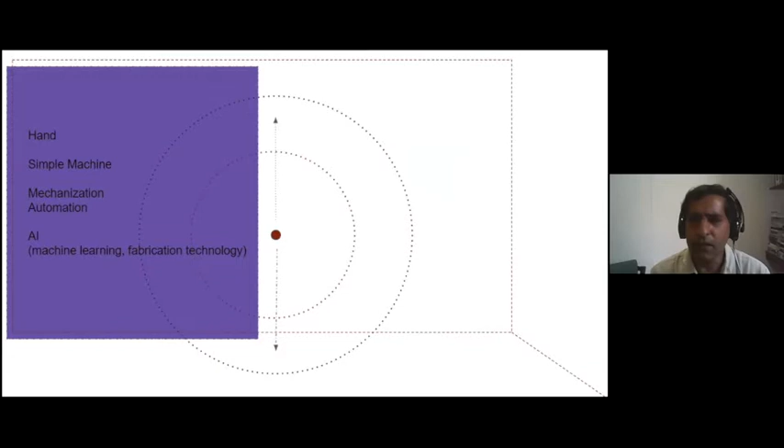So we all know that we started with the hand, and then we developed simple machines. Then we mechanized it a little bit, and then we automated it—automation meaning you completely mechanize it instead of partially. And now we are witnessing a world where we talk about machine learning, fabrication technology, 3D printing, and all of that.

We know that machine learning data feeding is constantly used by digital platforms to sell stuff. So if you check on your website about a particular kind of book, you'll be flooded with similar books. If you check a product, let's say a green color shirt, all you will receive is green stuff. So in a way, digital media is trying to corner you into a limited choice.

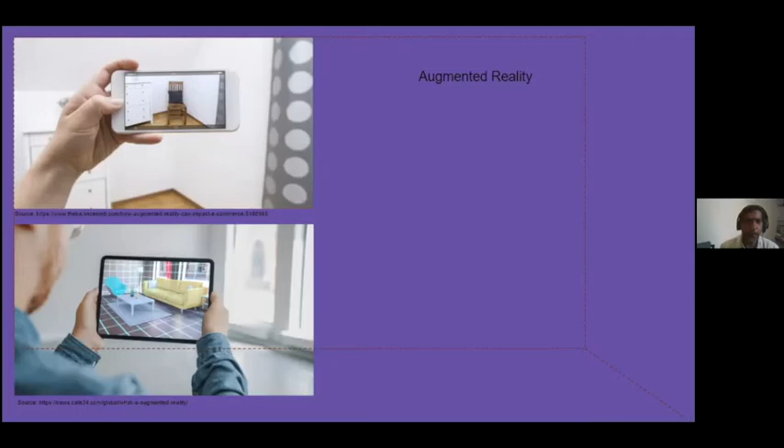If you look at the world of digital architecture, sometimes called parametric architecture, you'll find a lot of smooth, curvilinear forms. Parametric forms are generally mathematical equations, algorithmic, and as you change the geometrical parameter, the shape changes. That's a way of deriving form, but there are also many other uses, including simulating cities to find out how services can move efficiently, or how to organize buildings.

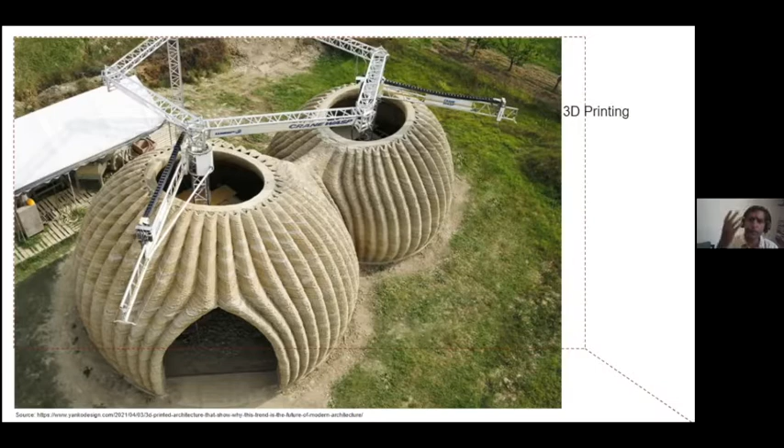3D printing, if raised to a certain level, can be an extremely useful tool, because otherwise most construction happens using linear members. If you want to cast or fabricate non-linear members without 3D printing, it becomes extremely expensive. So you can look at the potential of 3D printing in that sense.

Parametric design is pretty much common today. In the next 15 to 20 years, we will get a generation of people who would be extremely efficient in developing algorithm-based tools, or working with algorithm-based interfaces, unlike some of us, or unlike some of you listening to this talk. We are going to see a world of dramatic change, and one can look at this change in a number of ways.

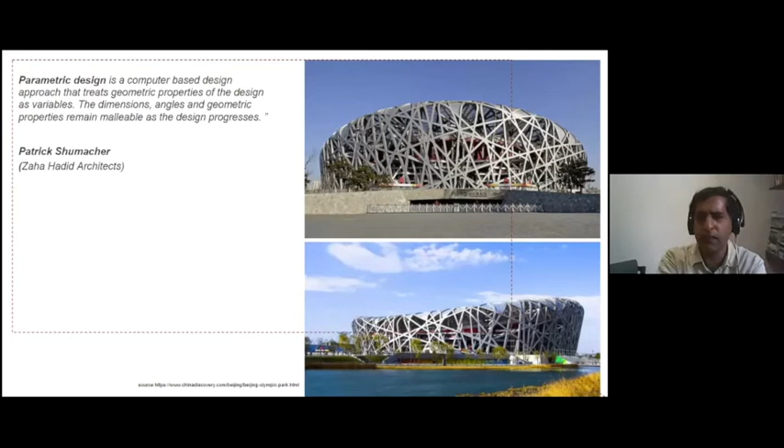Each generation of architects you know have mostly embraced their time fully, and those are the people who are pretty much well-known, not the ones working from the other side. The people working from the other side you will know as dots in space, like Hassan Fathy or some others. But the people who have embraced it are called the mainstream people, and you will know them much more than any other.

Now, we can only argue. We cannot get into a discussion of wrong and right. We can get into a discussion of trying to critically look at what it offers to the world and to the human race at large.

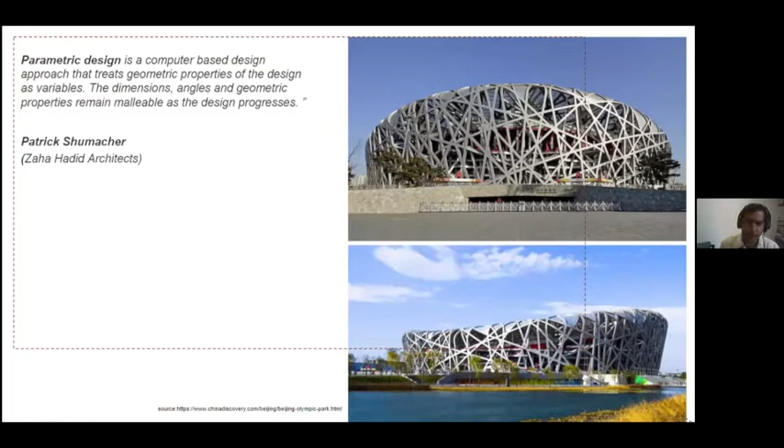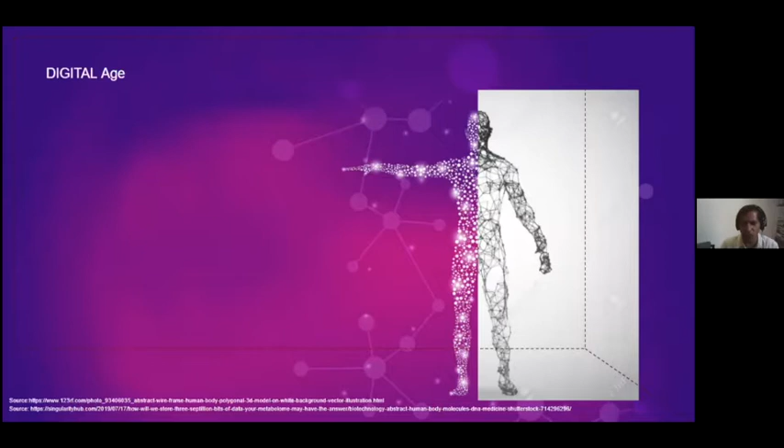So if you look at a digital age, the body is imagined now to be made out of surfaces, or imagined to be made out of atoms and molecules, connected geometrically and through polylines. So you imagine this to be an interconnected world. Now the question is, what happens to the hand in this kind of a world?

I'm trying to say that sedentary postures are privileges, and what is happening is that for whatever reasons - lack of working population, so you automate it, or the desire to meditate and enlighten, and in order to do that you need to sit and think about meditation as work, not making as work - therefore in a society you position some over the other, so one gets more precedent or more privilege, whereas in no way can you compare the knowledge of a carpenter to be less profound than the knowledge of a professor sitting and teaching courses somewhere. So sedentary postures are privileged over the postures of making.

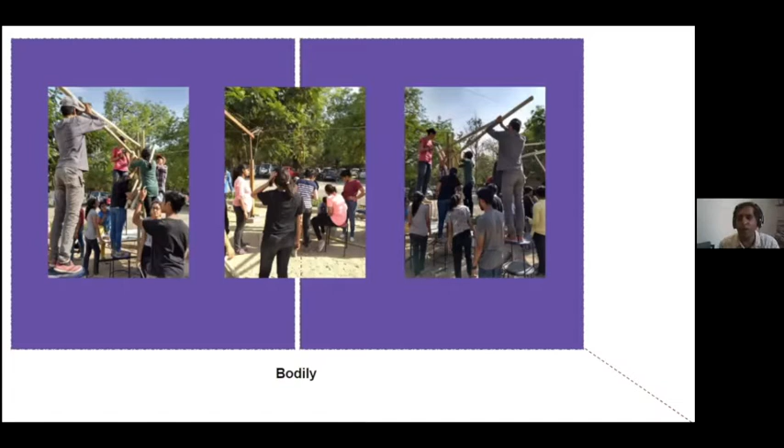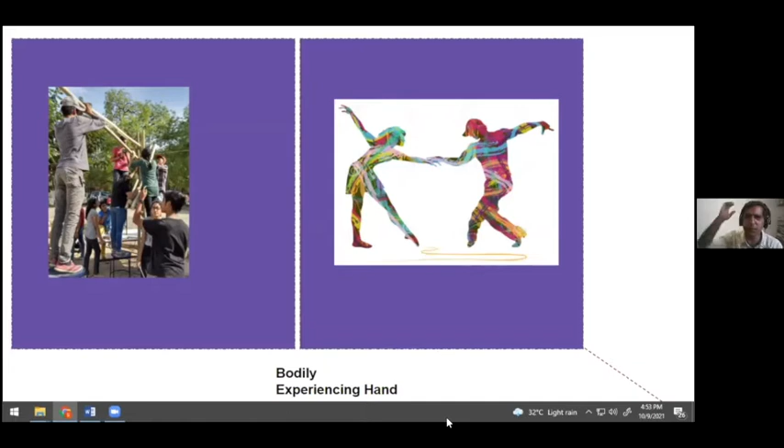So making is like dance. Like in dance, you use bodily gestures, you circle it, you make lines, you make planes, you make cones, expressing through bodily expressions. Similarly, in the act of making, all these expressions come out. But culturally, we privilege the act of dancing more than the act of making, for whatever reasons I'm not interested in talking about right now. So what we are interested in here is the body, and therefore the experiencing hand - the hand that is engaged, the body that gets engaged in the act of making.

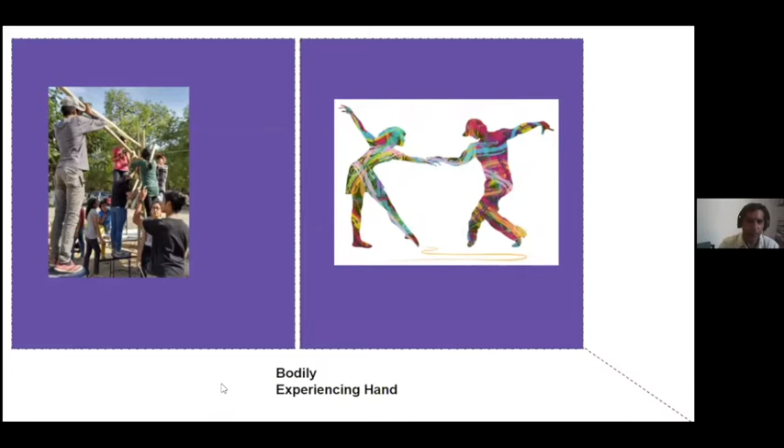Now, what is happening is that most of the time we are engaging ourselves in an orthogonal space. When we are engaging ourselves in an orthogonal space and we look at the grid that has been put there, what happens is that in reality...

In this kind of an image, one is standing on the ground, and it is bearing something. Then there are walls or columns which are also landing onto the ground. And there is some spanning member which is resting on the wall. From the wall, it goes to the ground. So the spanning member, when it is orthogonal...

it gives the impression that the space is orthogonal. It also gives the impression that these elements of the space can span itself linearly, and therefore we get these kind of spaces. Now there is a construction logic also to get these spaces, but we can discuss that sometime later.

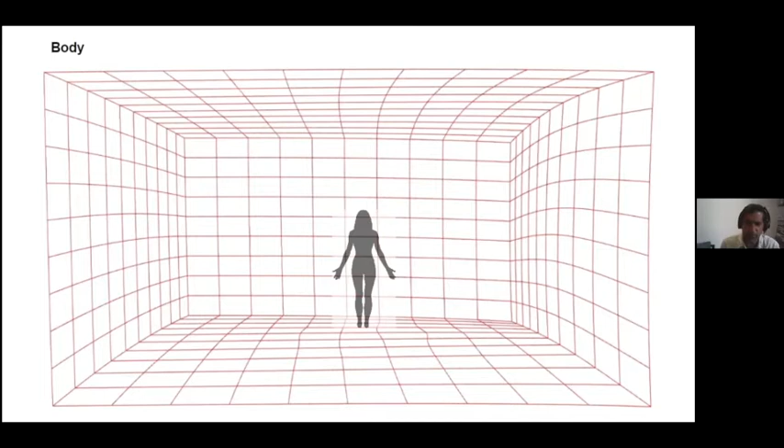Now what happens when this grid gets distorted? Once from the orthogonal grid, we go to a grid which starts getting distorted, the distortion in grid is a change in shape. And change in shape is force. So for example, let's say you can use a linear member...

and you can get a hyperbolic paraboloid. But all curvature you cannot get using linear members. So for that, you have to curve the space in order to get it. And therefore, the change in shape...

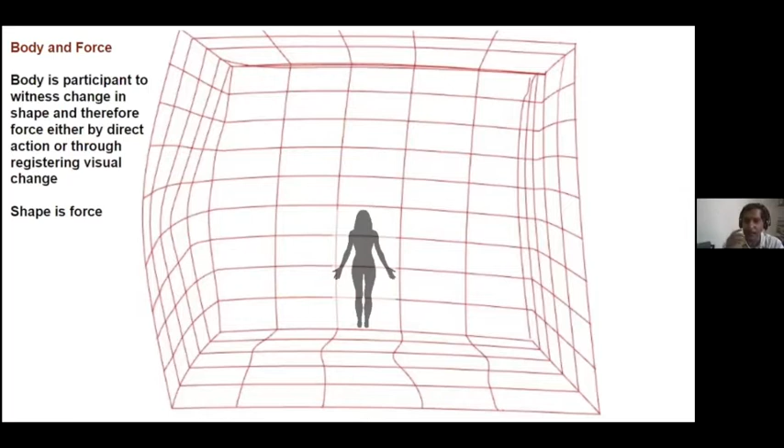is force. And when we are moving in that space, in reality, when we are seeing these curves, we are participant to the change in space, the change in shape that we are experiencing, and therefore the force. So we are participating in it, we are not directly experiencing it in the sense of weight and mass, etc.

Which means that the distortion in grid can give us any kind of space, and second, change in shape, if it is force, and if it is not—let's say fake for the time being—that it is not an impression of the curve, but in reality is required to transfer force, that becomes a way to articulate. So I'll go a little bit further.

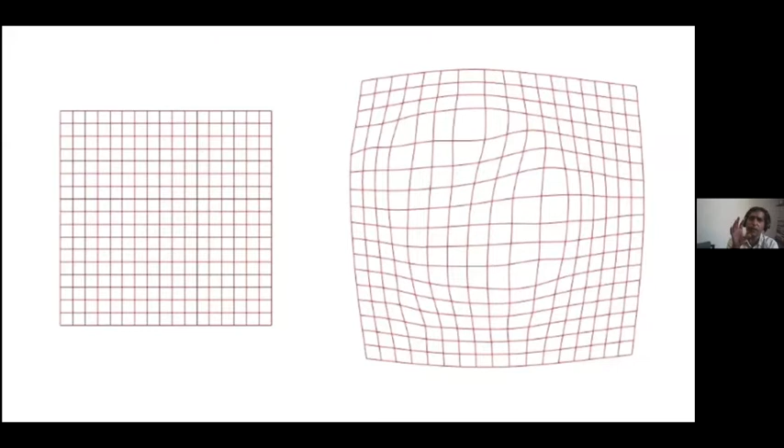So what we are doing is, if you read physics a little bit—I'm sure you know a little bit about A Brief History of Time and black holes and all, which Hawking wrote—basically, from dark matter, you sort of see the universe expanding.

But what is space? If you look at it from the point of view of physics, space is occupied by matter. So space is matter and matter is space, if you start looking at it from that point. So if an architect says that they are making space, most of the time what they mean is that they are making space by organizing the walls.

And in order to further argue this case, if you are saying that the wall is displacing material, the wall that the masons are making is displacing material, and they are making space so that the wall can be in that space, we are able to—but the language of the space remains the same for both the agencies. Now...

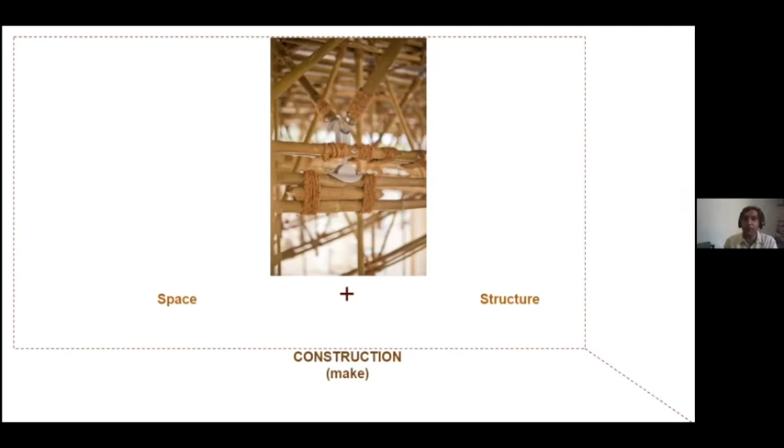Without the knowledge of the makers, there is neither space nor structure, because structure requires material to get its form and shape. There is no visualization of structure without material, because it is the material that gives the form. So our practice is to some extent an intersection between structure and space, on the crossroads mediated by detailing.

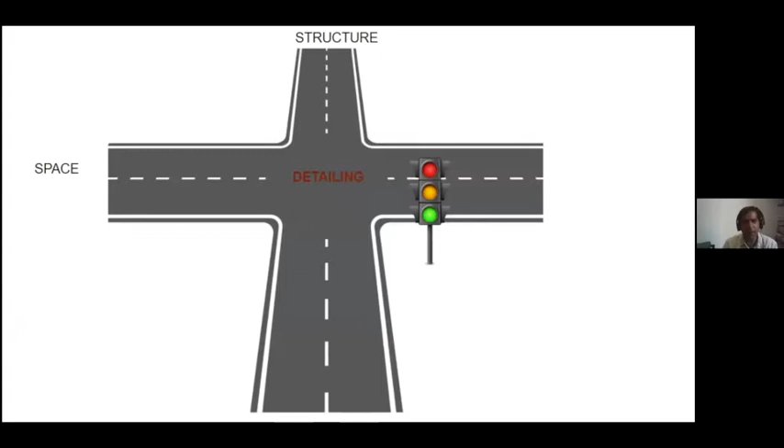I'll go through a few slides to give you some sense of it. Some of these projects are either done or in the process of construction, but you can see the attention to detail in some or the other way.

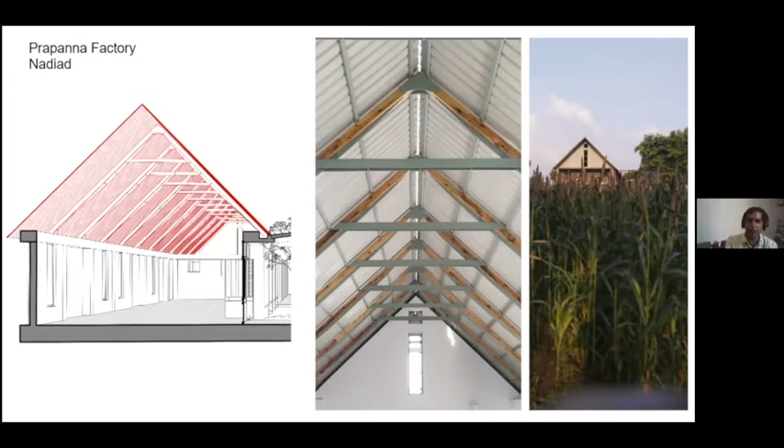If you look at this project which we are doing, on the left side of the plan there are columns which are closed; on the right side, there are columns which are spaced. Architecturally, once we get a program, we try to connect to structure and space, using tectonics, or the idea of structure and space together, so that it also creates a context for articulation.

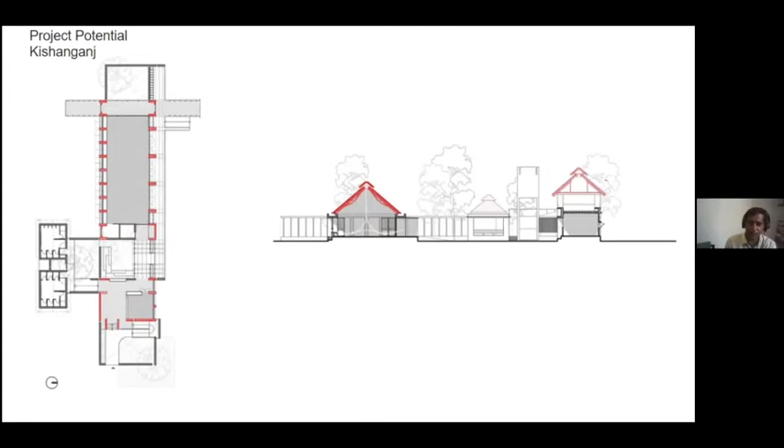On the right side, your spans increase, so now you have to think about beam depth and all of those things. All these things lead to articulation. This is being made, you can see it - they have to change the sheet. This is temporary, but it's still being made right now.

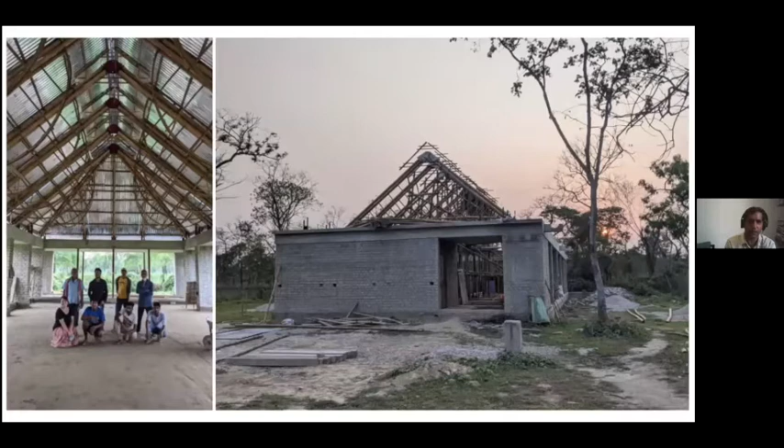If you look at the small residence which we were doing, most of the time we are fairly clear about our structural grid, and we position ourselves in a way that does not really depend on the structure engineer. Of course, we heavily depend on their calculations, but we have a sense of how to make the structural patterns, both in space as well as on ground.

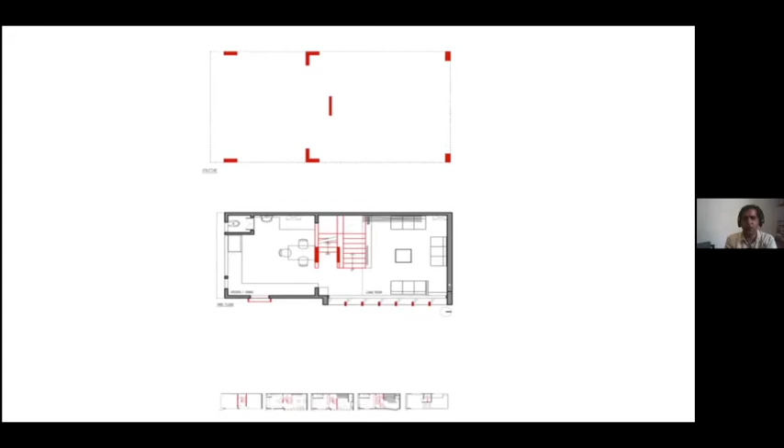It's a very small residence, about 50 square meters. The staircase is mediated between the two spaces to make it feel large. It has two common walls and two sides that open up. It's fairly open, and it just takes in light from one side.

Every time we have an opportunity, we want to express lightness. Because it's a very tight building, tight space, we use steel, and we express it by folding it. Once we fold it, we look at how much we can push it - it's asymmetrically placed, using two angle sections that fold themselves.

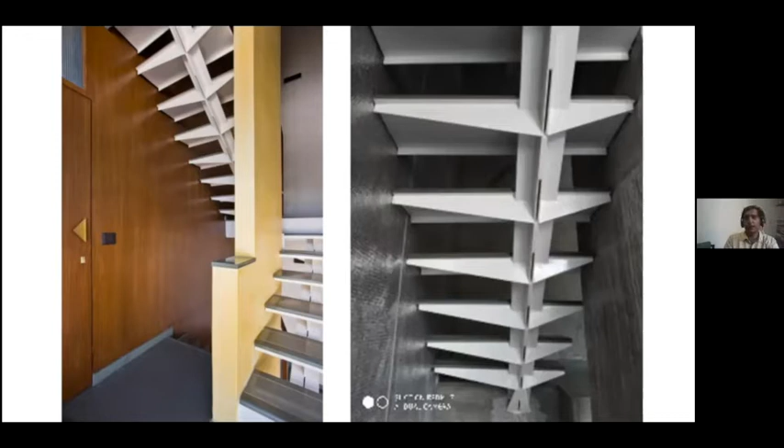It also uses stone as an upper member to strengthen it, because if you look at the width of the step, it's not sufficient to give enough strength - it still has vibration. Once you put that stone member, it becomes an active system and stops the vibration.

So you look at some of the space again - both interior and furniture, everything has been done by us.

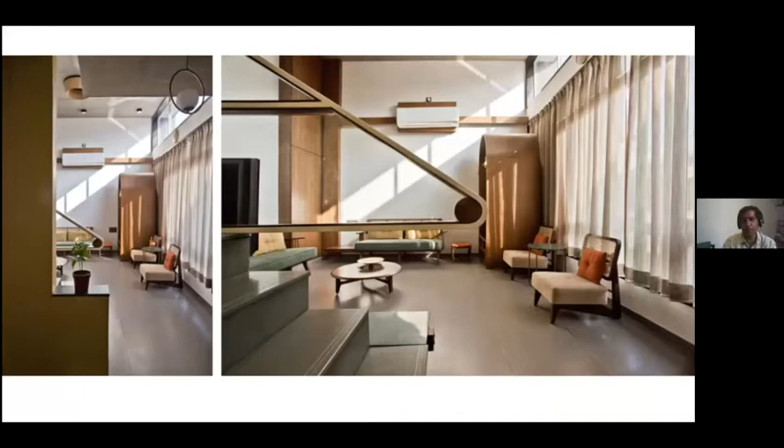We also engage in exhibition work. This we did with Workshop Inc, where we developed the exhibition pavilion, or the stalls, in bamboo. It was all made in our workshop in Surat, transported, and then assembled here - made in parts and then assembled on site.

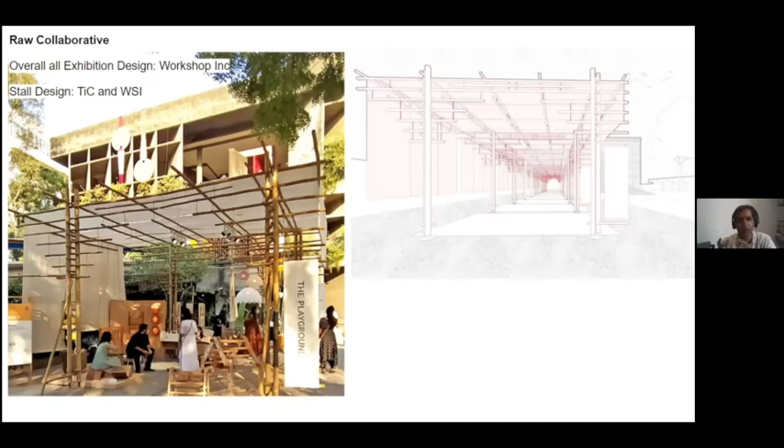If you observe carefully, you can see there is no continuous member - there are gaps, which means the vertical members help transfer load. In a way, each of these members are floating, and there are steel rods trying to connect and make it whole. If you look at the posts, they are diagonally organized, because then it becomes a three-dimensional space that we are creating, since most of the time we are looking all around.

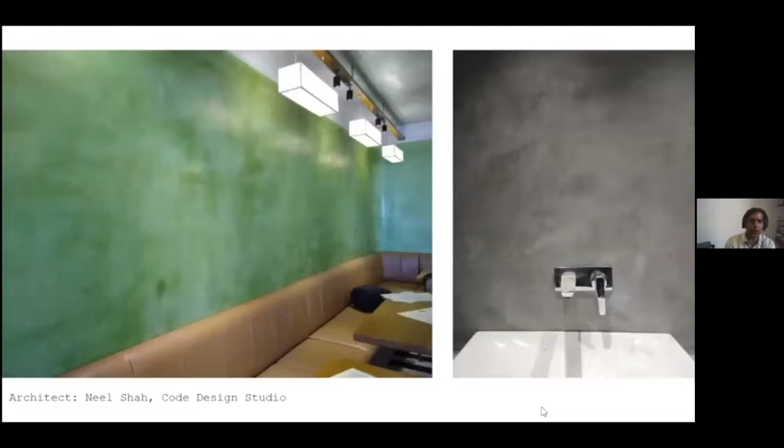We did this Alila View in Goa, this whole wall which we did in poured earth. We also do a lot of lime plaster, so you can see some of them here.

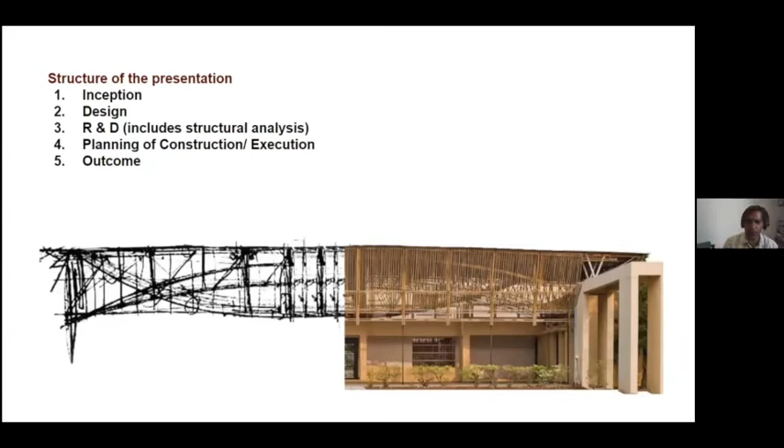I won't show too much more, but I've given you enough background, and I'll now move to the real project. This project is basically a Yogashala where people come to perform yoga. It's in Mulugu district right now, an area declared a World Heritage Site, the Ramappa Temple.

The client is Jyoti. She's extremely passionate and knowledgeable, both in terms of education, but also in organic farming, yoga, and wellness, and all of those.

She was earlier running the school, which was designed by Sudhir. It was quite a beautiful school, actually. But she wanted to move to the next level, and said maybe she has worked enough in education - she wanted to work in holistic living, etc.

That is how she actually asked Sudhir to do it. So Sudhir gave us the project and said maybe you guys can think about doing in bamboo, because she's trying to think about a yoga place, and it has to be somewhere celebrated. So this is how this project got into being.

This project is around 3,400 square feet, with a 78 feet span. This is currently the largest span in India, and we have used around 2007 bamboos in constructing it.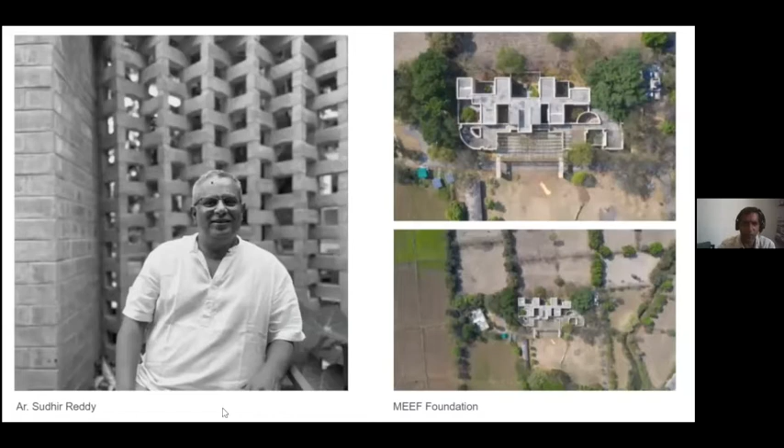Initially, this is the site. We have the Ramappa temple here, and this part has been declared the World Heritage Site - it's a beautiful surrounding. There's also a good amount of rainwater harvesting.

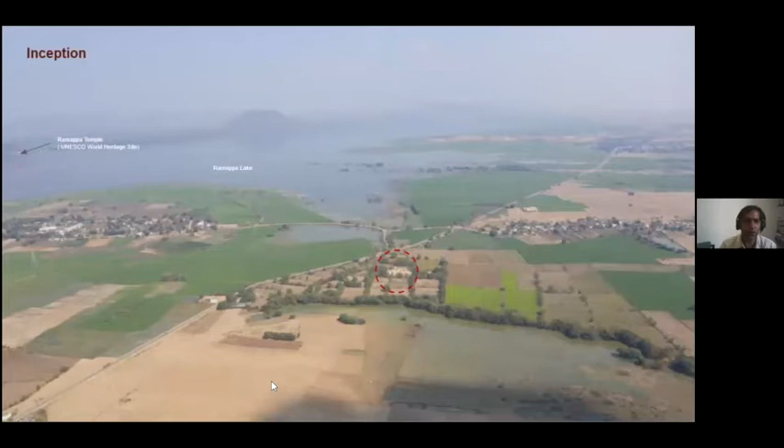They do the rainwater harvesting, and then use it over a period of time for cultivation, especially paddy. So this is what the school was like.

Earlier, she had asked us to design a separate building and treat it like a jewel. So we started designing for a separate building where we have this sense of yoga as something which gives you some degree of balance, and elevates you in some way. It lightens us in some way, and it's also a secular tradition - if you read the Yoga Sutras, Patanjali, etc.

Which is actually hardly a work of Patanjali. But anyway, if you read it, you may realize that it is close to atheism or agnosticism. In no way is it close to the other side.

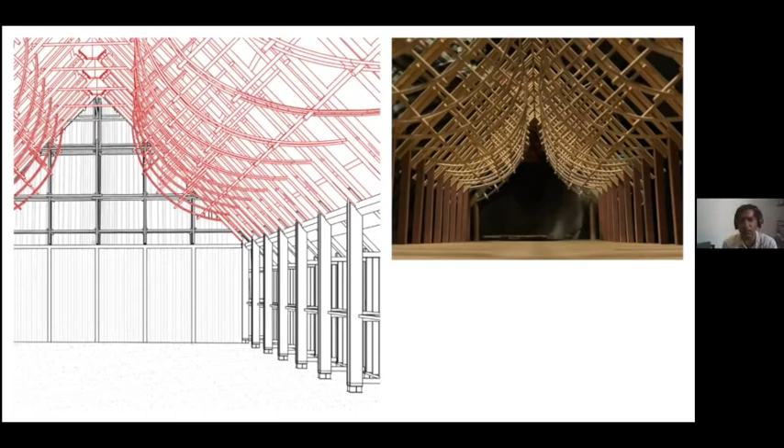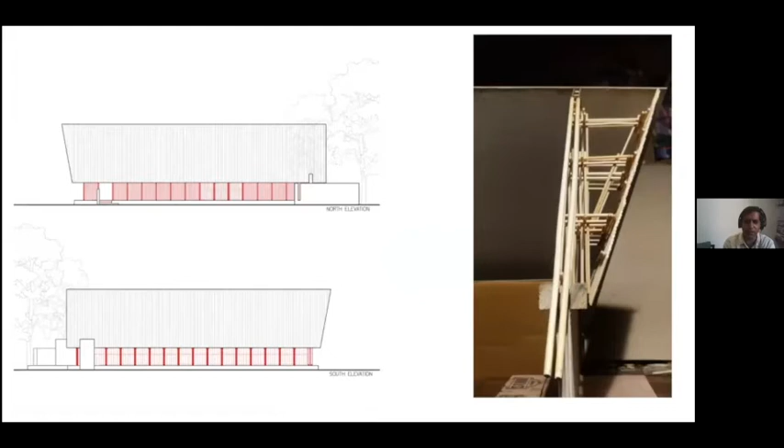Earlier we had done this like a pavilion, with timber and steel columns or posts, and then a bamboo roof, and we had worked out details. On the right, we had worked out how to end these kinds of buildings, because that was something we had been struggling with - Milind and myself have been working on this area for a long time to figure out other ways to end it than what we had been seeing. So earlier we had done these kinds of articulations.

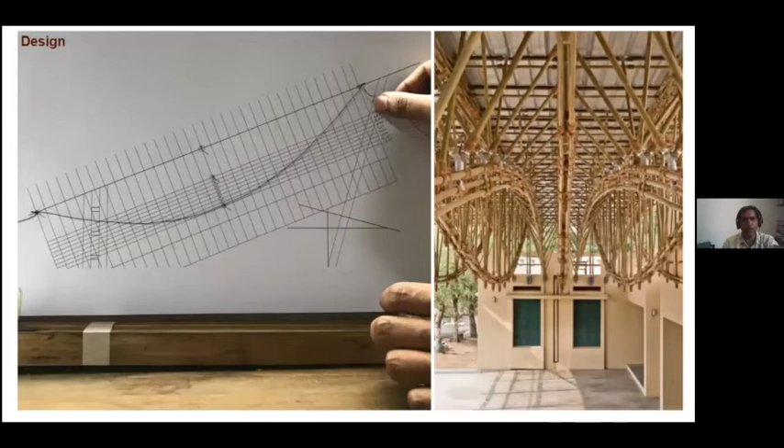We had done full-scale models, etc. But then it didn't happen, because Jyoti thought it was better to use the central space and really do a better job than to add one more piece of infrastructure. So after a long thinking, we said okay, it's all right, let's go ahead with it.

Sudhir further complicated it by saying we should not work in the shorter direction, but in the longer direction. So the challenge became tremendous, because 78 feet spanning was a lot of a job, and we had not done it. The only system we knew worked was trusses, or a compression-based system, but that was not something we were very comfortable with.

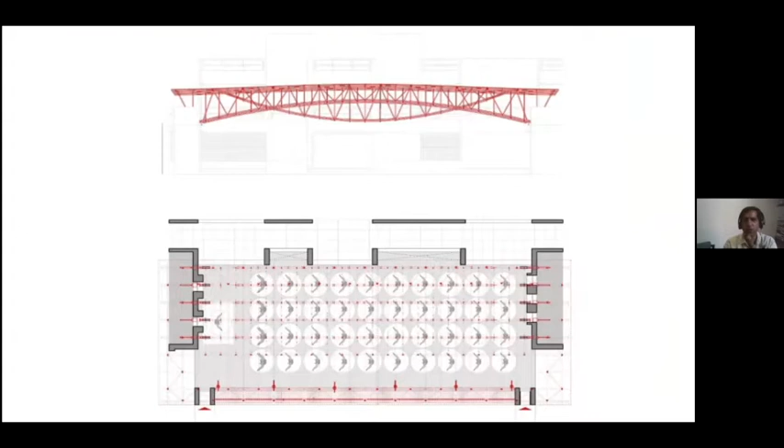I'll explain later. So this is what it looks like right now, and these are some of the models of it. This is what the plan looks like, and that's the section. Around it you can host about 40 people to perform yoga, and if you need more, you have to spill over.

What was important in our mind was, one, the fear of whether we'd be able to span it or not, and second, our discomfort with trusses, because we had not seen an ample amount of trusses in nature. We had seen triangulation, but not a very convincing example of trusses.

Though the body has some amount of it, much of it is thought of like a tensegrity. So we were thinking about how yoga is about balance, and life is about expanding and contracting, like a tree and a seed. The tree decays over time, gives seeds, and the seed again becomes the tree, and life keeps going like a cyclic process. So the continuity is of the process, not of the individual.

We were thinking about this experience of expansion and contraction in the space being important. Looking at it from the point of view of reversal of forces, what we worked out was a beam in which the deflection is taken care of by a curvilinear member in tension, but stiffened by triangulation in the plane. Then you have a compression member below the beam, so that during extreme deflection—which happens because of creep over, say, 5-10 years—there are diagonal members starting from the top chord of the beam and resting on the compression member.

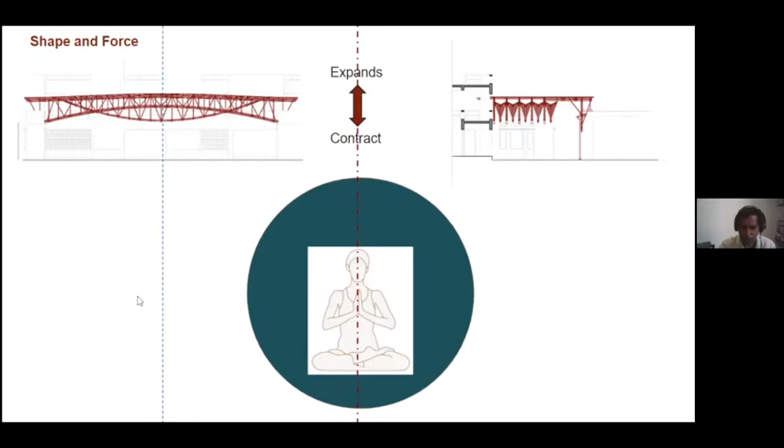So look at the density of the member—if you look closely, it diagonally comes down. Every time it becomes sparse and then dense, and similarly this is happening in the other direction as well. That's how it gets manifested.

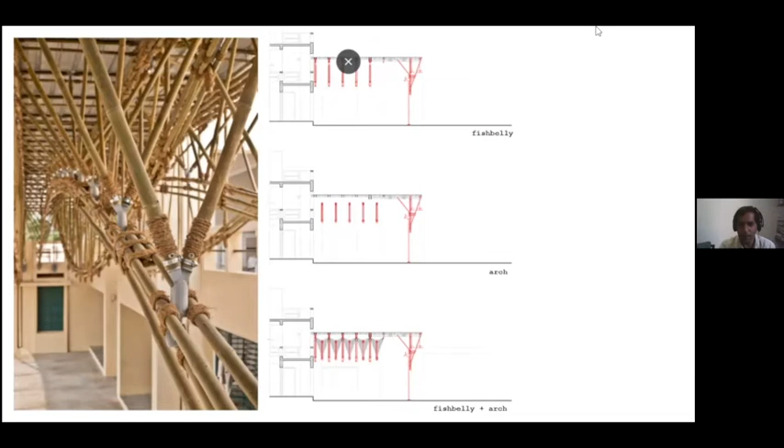What we're calling the fish belly is at the back, and the compression member, which is an arch, you're seeing here. From the top chord of the fish belly, which you see down below, the members in compression get connected onto the compression member. It rests itself diagonally onto the compression member, and that is how we were tactically able to span it without really getting into trusses.

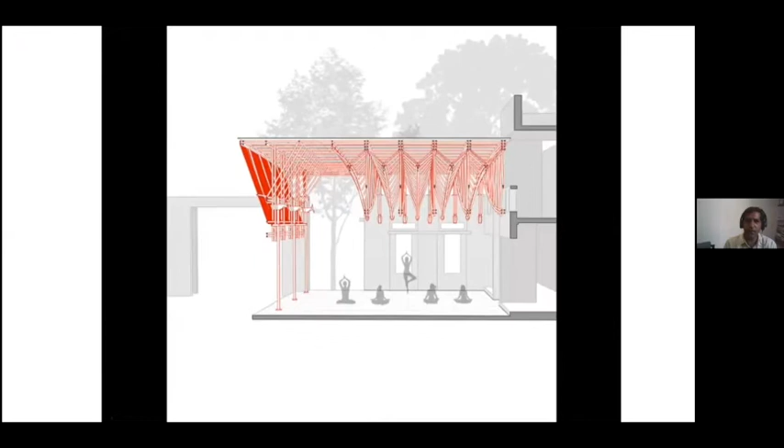If you look further, we'll show you—you see, as you go along, it rises and it falls. So it's both the sections, and our plan is oriented accordingly so you can get a sense of it.

If you look at this right image, this is the space of performance. You want to treat it as sacred or whatever, but some experiences require a particular symbolic treatment to make them important, apart from the design itself. So someone comes there and performs yoga in this space, which on one side is connected to the landscape, and on the other three sides has the building with some porosity. Then there are leakages on the other side a little bit, and this was the gate of the school, which we had to use to make a slightly larger space in the other direction.

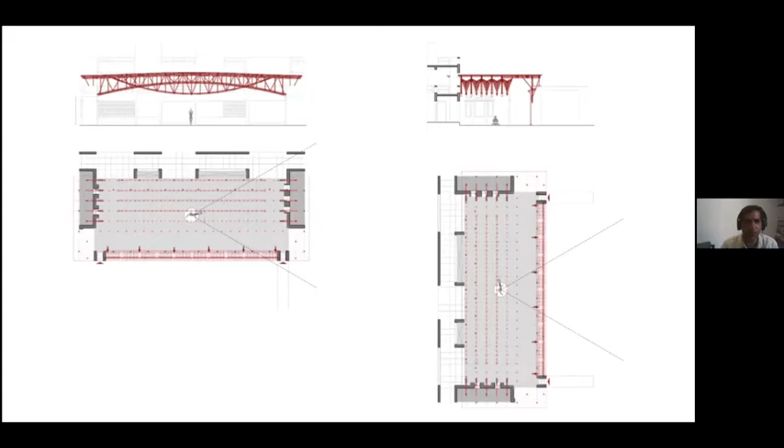Now visually, you start seeing and connecting depending on what orientation you are connecting to the other side. I'll show you further, so if you look at this now as an experience, if you're performing.

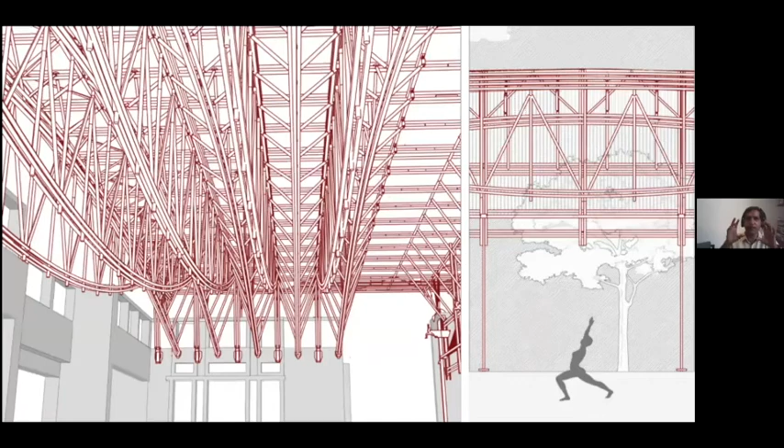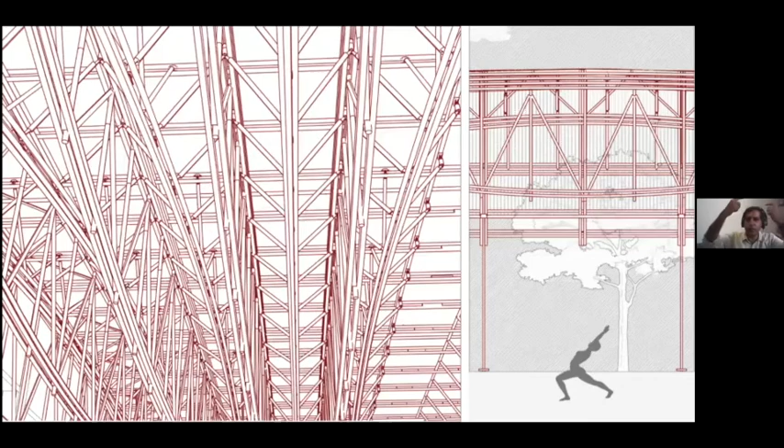As you rise and bend, the space starts animating and changing itself because of the way this articulation works. So you see sparseness, denseness, something falling, and something rising. The compression member rises, whereas the tension member falls when you are at the center.

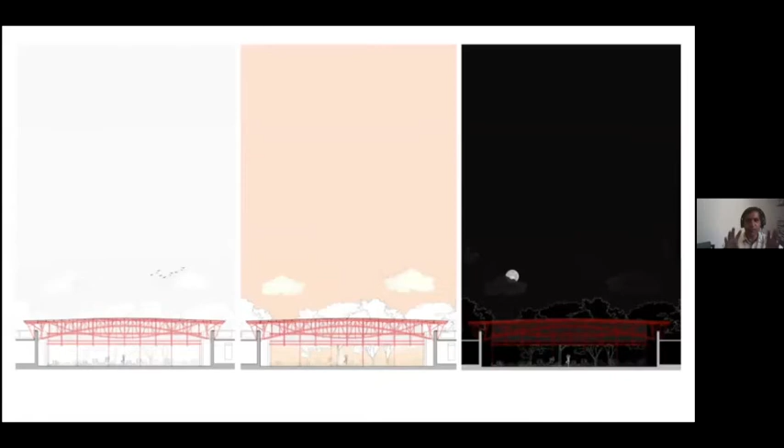And morning, evening, and night, how will it come? We're also trying to imagine that time, what will happen as a space, because this space is from the other side and you are looking outside.

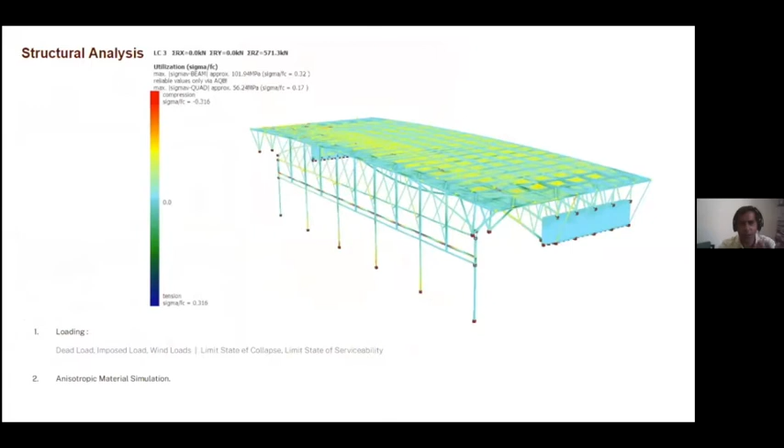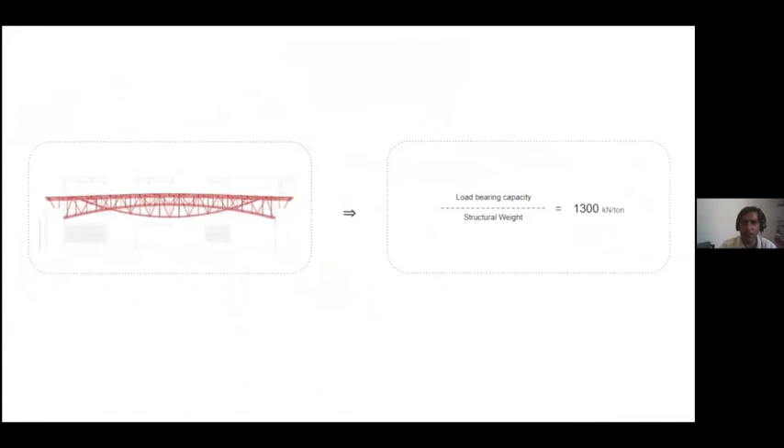Anand had done some structural analysis, so I'll not get into the details of it, but I'll show you how he has animated it. The load bearing capacity by structural weight is around 1300 kilonewton per ton, which is quite significant. He has animated this, which will give you a visualization of what is happening.

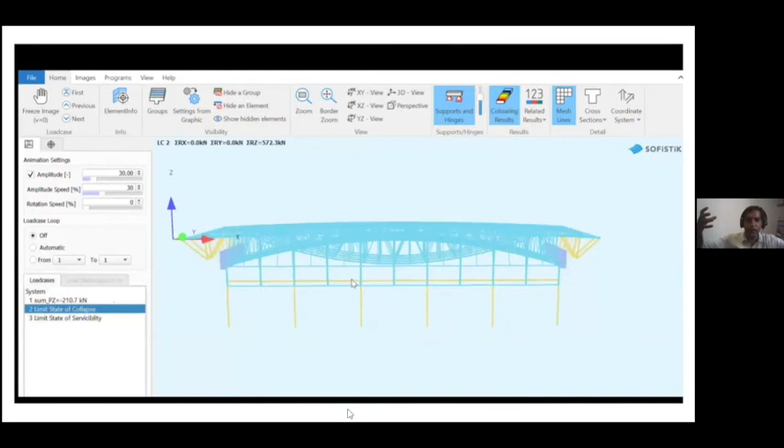This part is little weak because this is the part where the spanning direction changes, since we don't have members supporting members in the longer direction. So we had to support it in the shorter direction. That is how it becomes slightly complex and creates a weaker point here. This is under extreme condition - you can see what will happen.

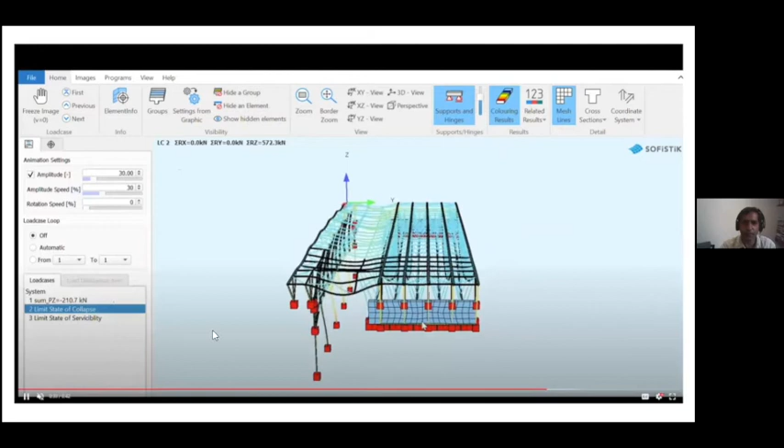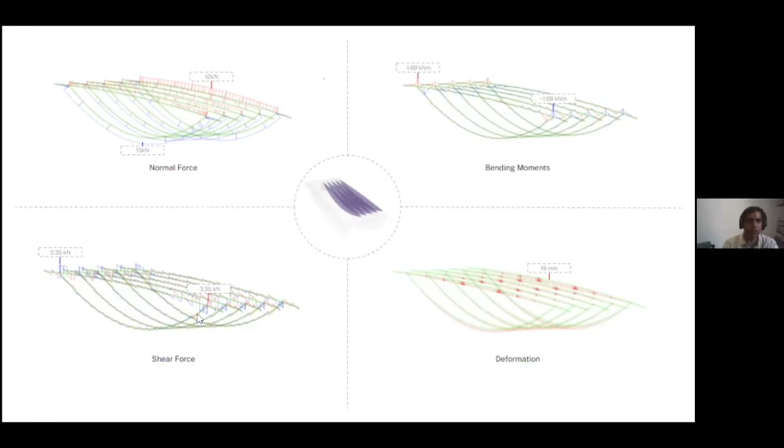Here's some of the force diagrams that he has made, showing how much it takes in normal bending, shear, and deformation, and how much it happens. Now, in order to do this project, we had to do a lot of R&D.

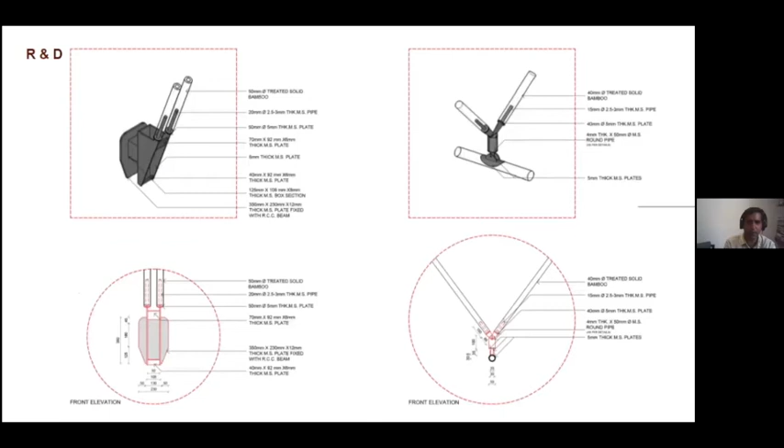If you look at various parts of it, these are the end conditions. The idea was that the end condition at least needs to have some articulation out of the wall to have an identity of its own, and then it touches the wall, creating that layer before it sort of touches the wall.

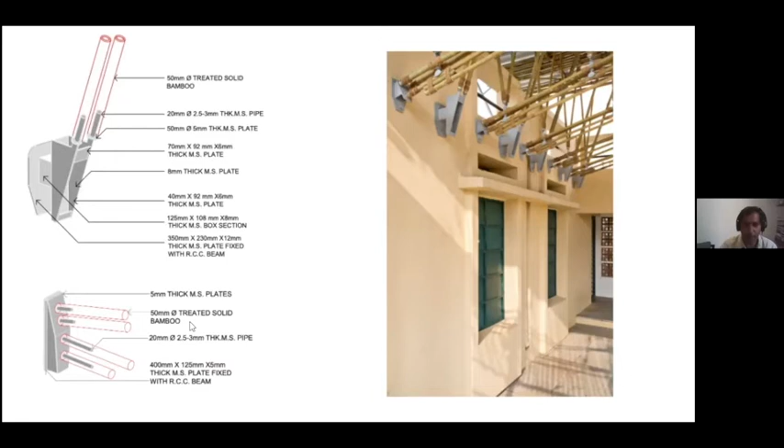This was particularly detailed by Manu and Jugal. Both of them sat to detail out these end conditions. So you see some of the details, how they are worked out. And the idea was that, again...

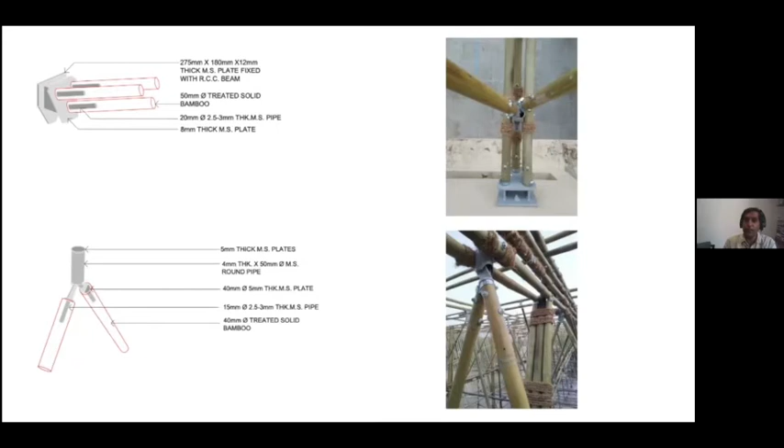This may end up into endless customization of the joinery, because bamboo is not of the same diameter everywhere. So we had to devise some middle ground where we can combine the industrial modes of producing and standardizing with how we work with hand. That is why we developed some of these details through R&D, and these are some of the details that we evolved out of our R&D.

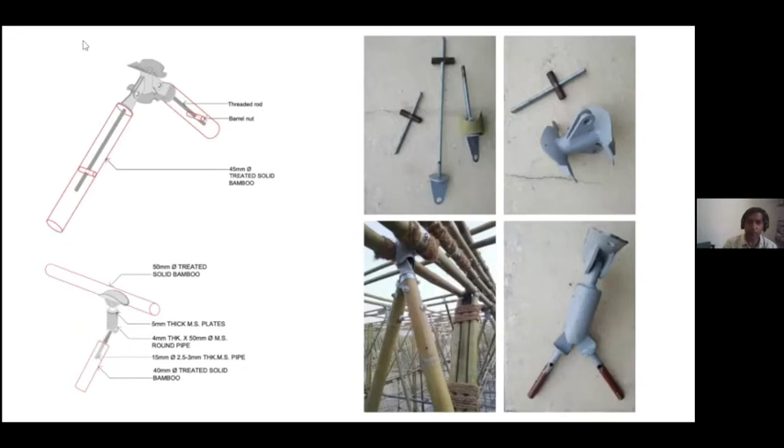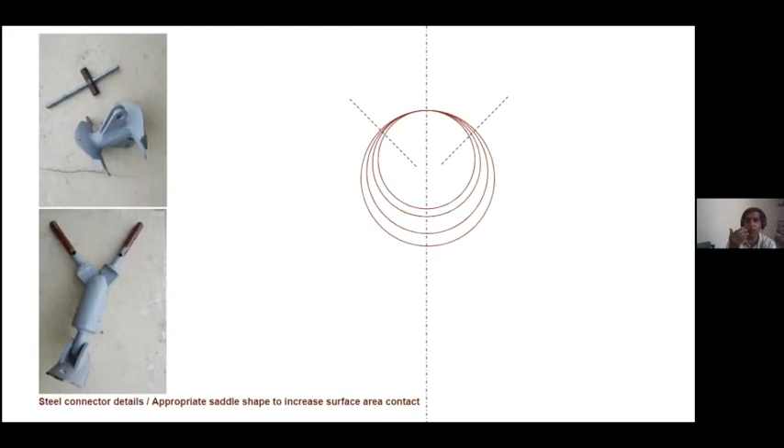One of the important parts of it is the saddle, because the saddle was worked out looking at the range of diameter which is there for the bamboo we were using, so that for some range the same diameter of the saddle works. Otherwise, we would have had to customize it, which was not possible and is not the way industrial modes can work.

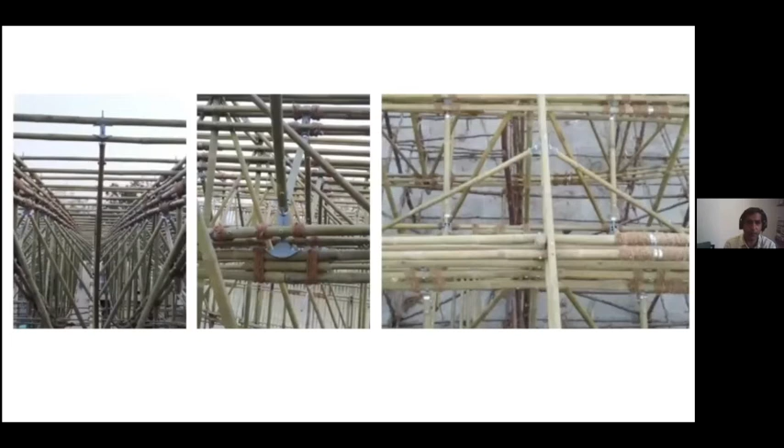And you can see some of the construction processes, and you can see some of the details.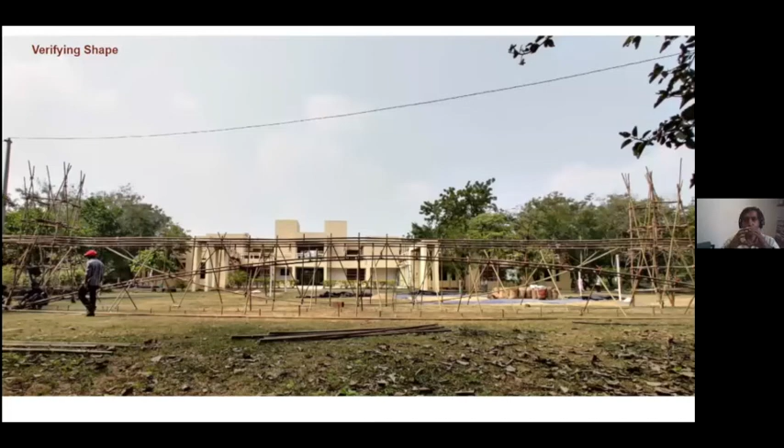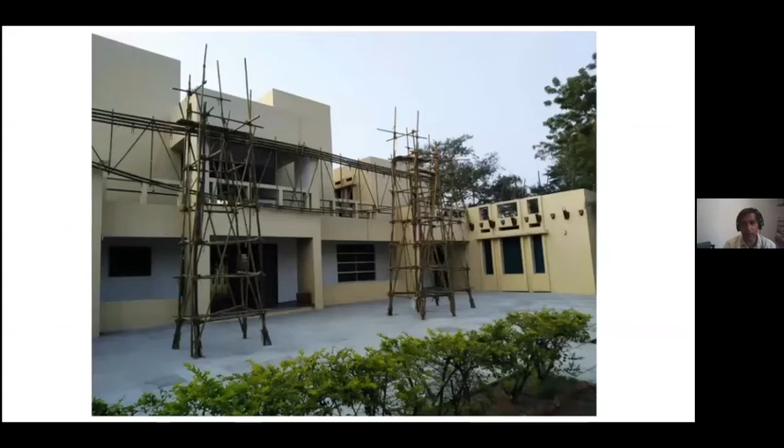Now, it was important for us to verify the shape, so we had to do it on site. These were made, then put up there, and tested - people were standing on it, trying to test it. 11 persons stood up, Manu asked them to jump, all of that stuff happened. Then once we were convinced, we said okay, let's move ahead.

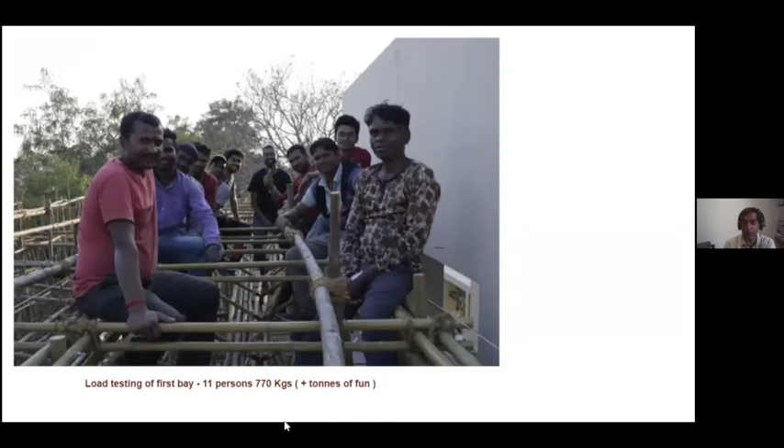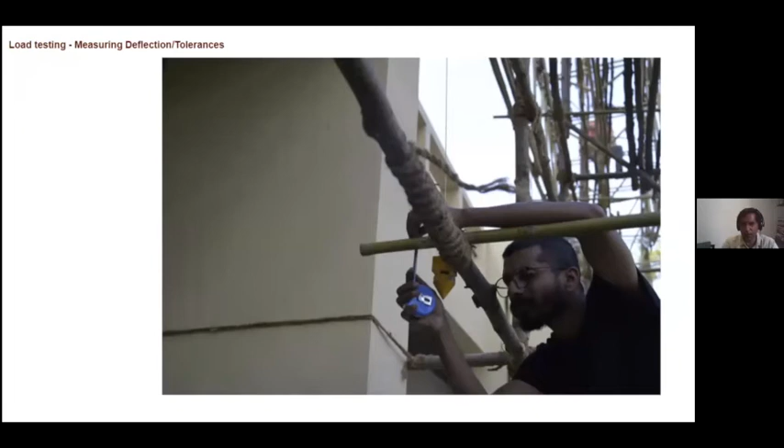Just to let you know, initially the lower member was only one, we added two. The upper member was only two, we added another two. So there were changes which we did on site, because this was an experimental structure and there was no way anyone could have done a calculation beforehand. We also did some deflection measurements, etc., and then we cambered it so that it works efficiently in bending.

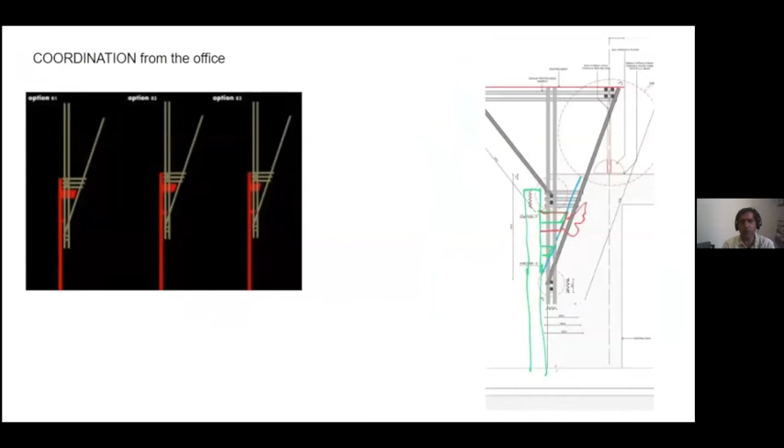So, some of the other details which we were trying. Of course, the coordination with the office these days happens through WhatsApp, etc.

Sagar, who right now is doing TA-ship in CEPT, was there on site with Jugal for a sustained amount of time to get it executed. And Basant Bhai and his team executed it, and they are all from Dang.

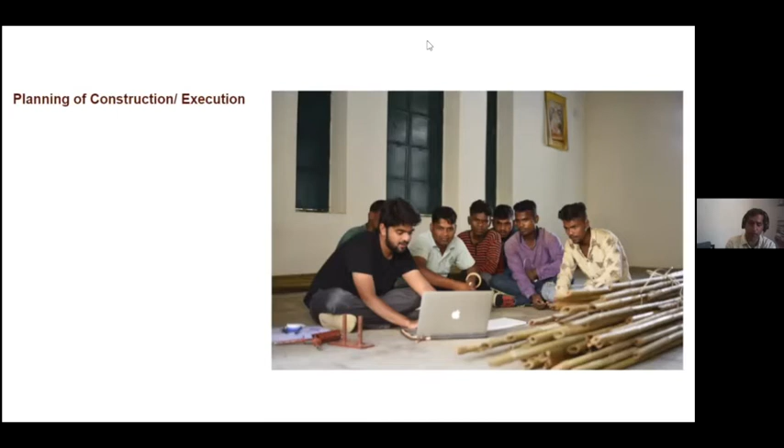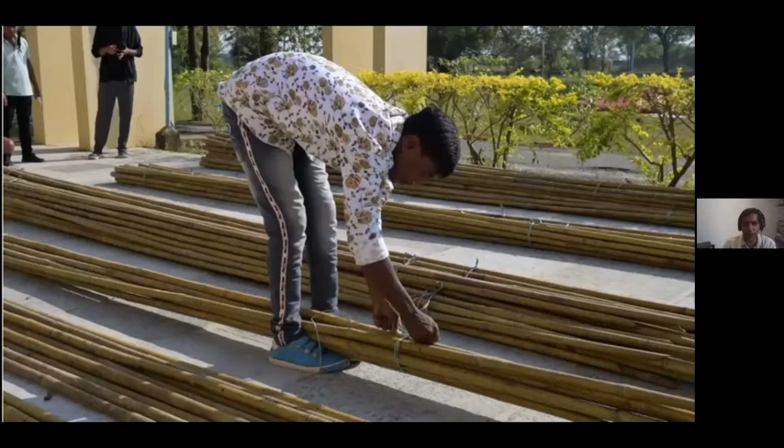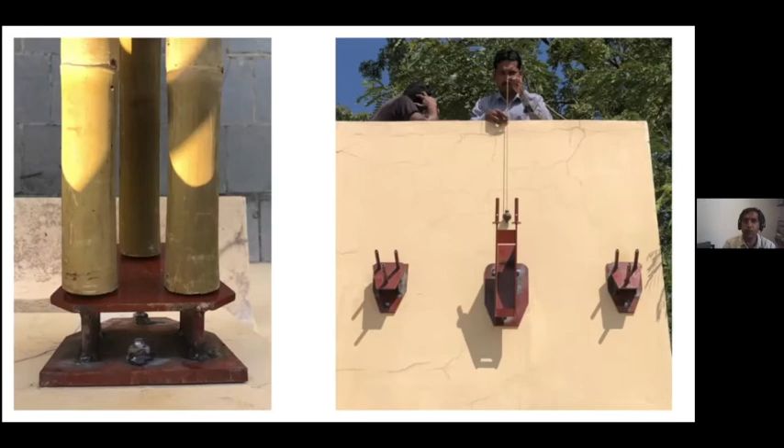This is the site. You sort the bamboo based on diameter, and then each of them are bundled based on where it is going to be used. Kanu was there from Ahmedabad to do fabrication work, because it was very difficult to get precise working. Any imprecise work would have a cascading effect if there were further errors, though you anyway need to have a tolerance in bamboo.

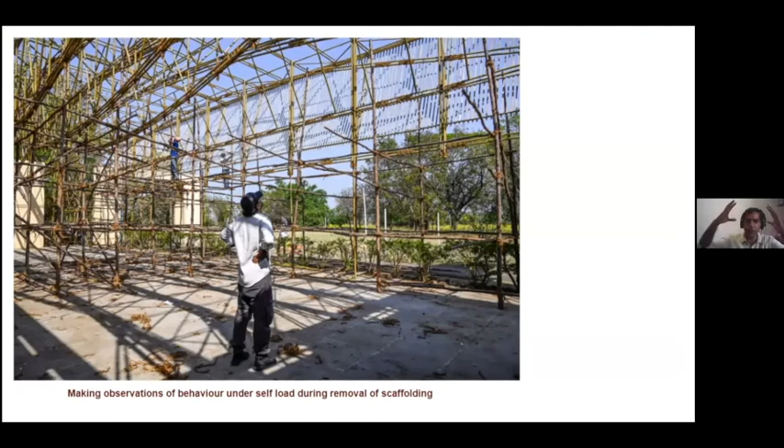So these are the construction sequence, you can see it. This is Jugal and Basant Bhai. Some of the site visits that we were doing. There was a fear that once the scaffolding would go, what would happen? It worked.

So this is what the outcome is. I'm in the final two minutes. This is Milind on the right.

If you see, we have put these posts. We particularly put it for wind load, because the rest of the places were secured. That place needed to be secured. And also the idea, the discussion started happening that, are we designing a roof or a space?

For a sustained amount of time I was somewhere in between, but Milind was quite convinced that we were designing a space for which it is good to put the steel posts, and that's how it started coming in. Then we further articulated it by putting some symbolic figures of yoga to connect to all kinds of people, because for some people it is useful to connect directly instead of in an abstract way. Some of this symbolic stuff in the fabrications was used to exactly do that.

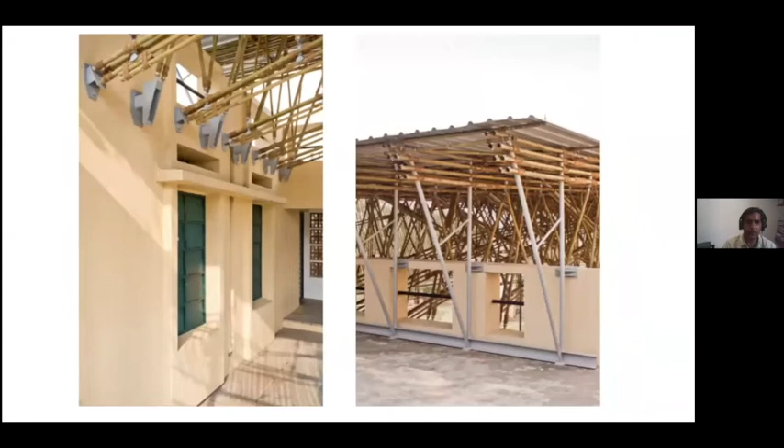So if you see on the right, this is the space. These are its end details. This is one test yoga training. This is what the space looks like.

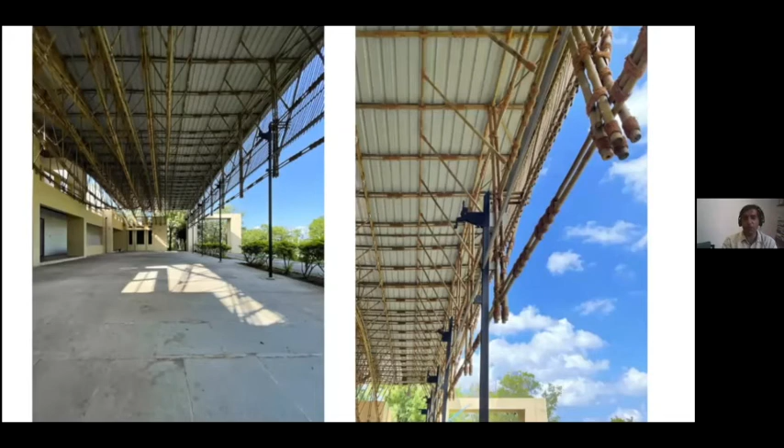After it was made, Jyoti said that it seems huge. So obviously it was huge, because that's why we were very scared to get into it.

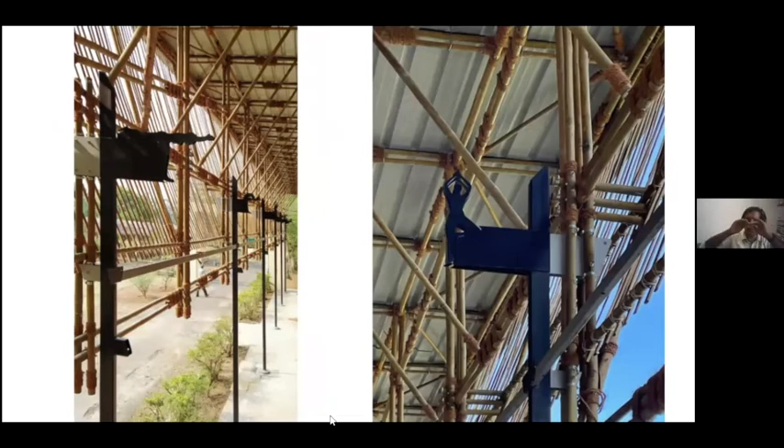And of course, these colors were also done to work out the scales a little bit. Some of them, not all of them, some of them. Yeah, so thank you.